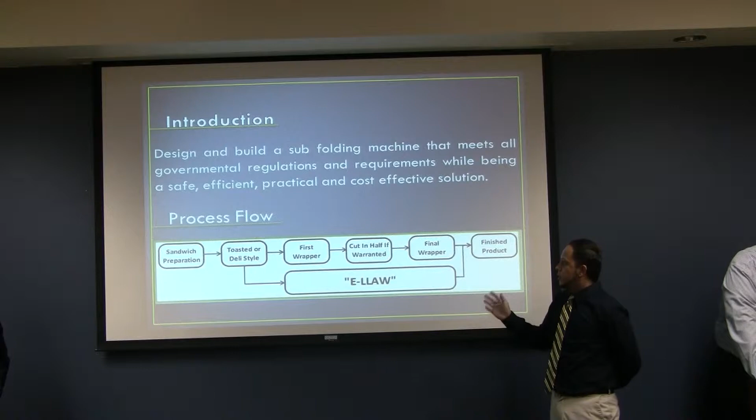As seen here, the process flow at a sub shop is simple. You come in, you choose your stuff, but what we're focusing on is at the end, we have some steps like wrapping the sandwich, cutting, wrapping again, and packaging the product. Our machine, code named E-LLAW, is going to take over these steps and facilitate them.

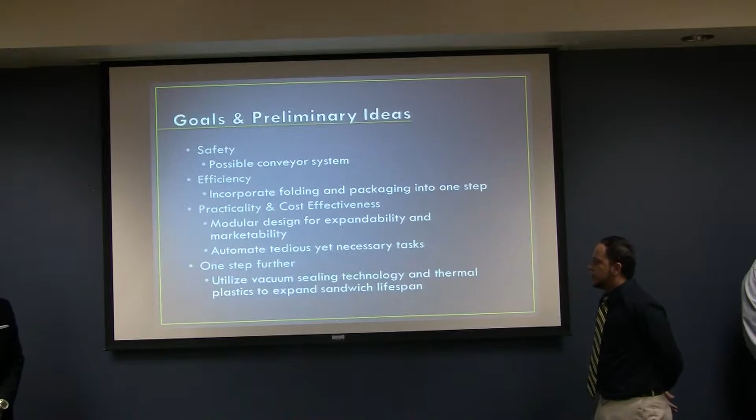Danny's going to explain how we're going to achieve this. As with any machine, our paramount goal is safety, and we intend to accomplish this possibly using a conveyor type of system. Secondly, it needs to be efficient.

To tackle this task, we intend to consolidate multiple steps into one, mainly being the folding and wrapping of the sandwich. Lastly, it needs to be practical and cost-effective.

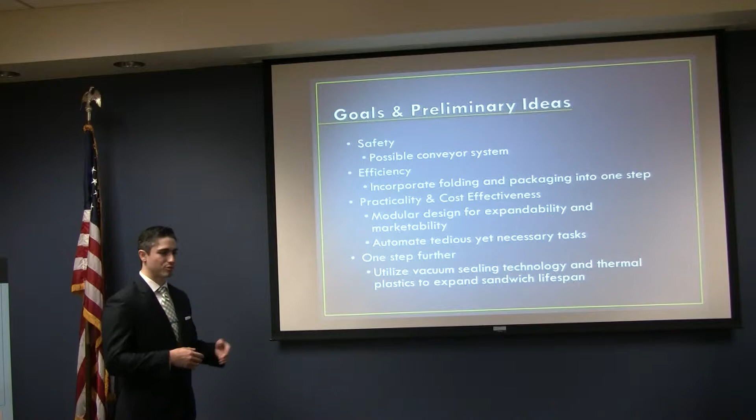To handle both of these, we intend to design a modular system which will automate a tedious task. In addition to all these goals, we also want to utilize vacuum sealing technology to prolong the life of the sandwiches. This represents a photograph of a machine that is currently able to be purchased.

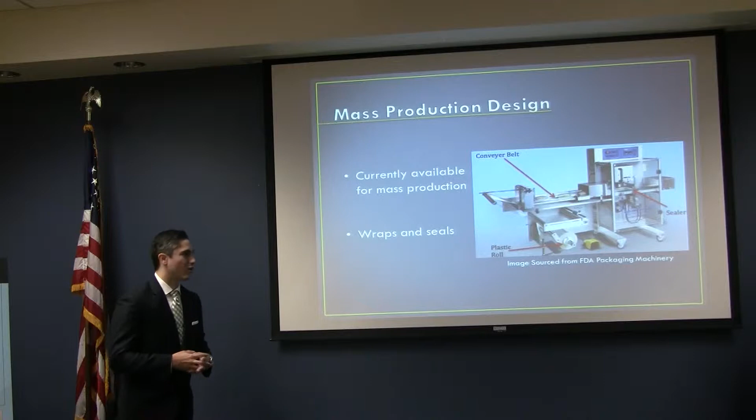You will notice that it's rather large, so our goal is to shrink this on a small scale. But this machine also utilizes the same type of technology that we wish to use, being the vacuum sealer and the plastic bags. Omar will now discuss some of the research that has gone into this project.

Since our end product is going to be a global reach product, in other words trying to be viable to the market itself on a global scale, we're conforming to the ISO standards. ISO stands for International Organization for Standardization. 22,000 stands for any food-based process or device.

On top of this, we're also conforming to ISO 9001-2000, which is the quality management arm of ISO 22000. This allows us, if we achieve ISO certification, to further facilitate OSHA and FDA certification down the line, since some of the guidelines are equivalent.

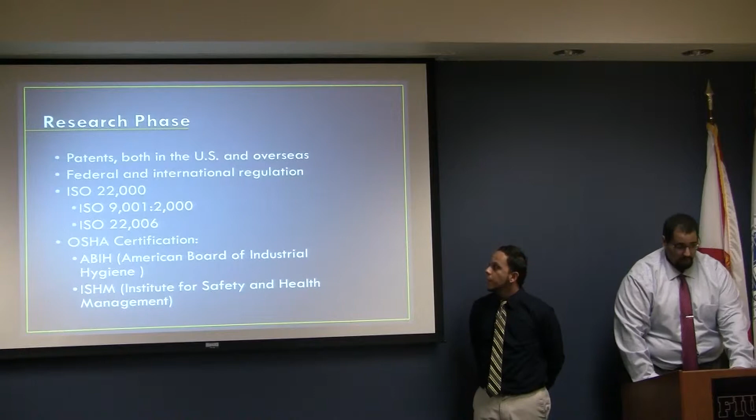Carlos will now speak on more of the global aspects of this project. As Omar mentioned, the ISO guidelines make our product marketable globally, but we also have to look at small details such as safety, where we have to use warning signs on our machine that are understood globally.

Most of the world uses SI units. We plan to use English and SI units. We also want to look at guidelines—for example, the European Medicines Agency may have health guidelines that we don't have here, and just by using those, we make our product certified in those countries, Europe in this case.

We also understand that environmental factors are important nowadays, so for our parts we're looking for corrosion-resistant materials that will prolong the sustainability of the product. And for a wrapping medium, it could be plastic or paper—we're looking for biodegradable and recyclable parts.

This concludes the research. We're going to move into the design phase, and Omar's going to take us through it.

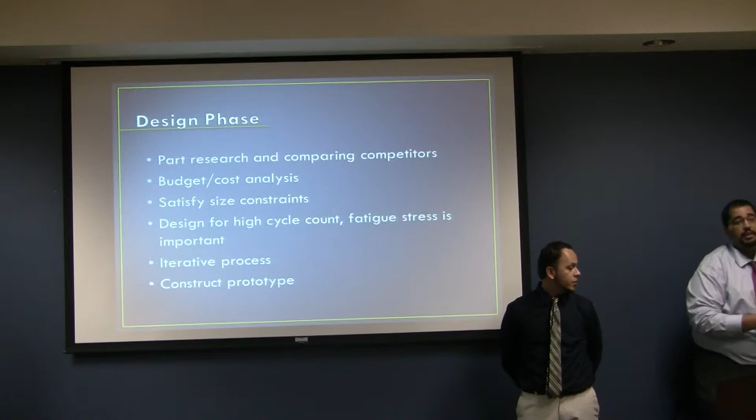For the design phase, since this is going to be a device which will eventually be patented, or ideally be patented, we're first going to actually research the market, both domestically and globally, to find out any device comparable to what our design is.

Secondly, after we do this, since we are given a budgetary and design constraint, we are going to get those devices and see what can and cannot be used according to our specifications.

Upon this, we're going to reiterate the budget again to maintain a high cycle life, which means a longer product and device mechanism life at a lower cost, which is ideal for the end buyer.

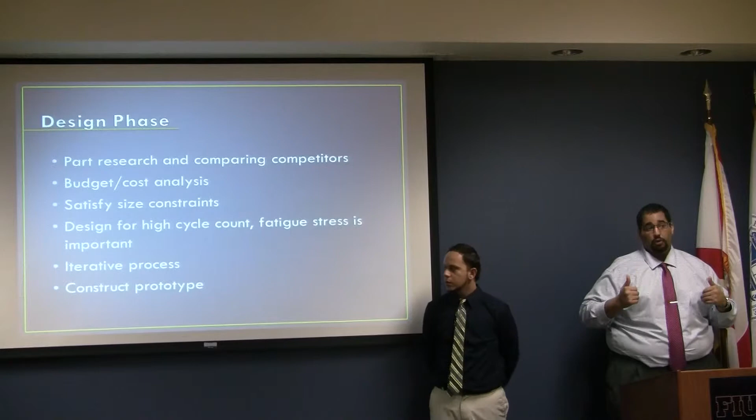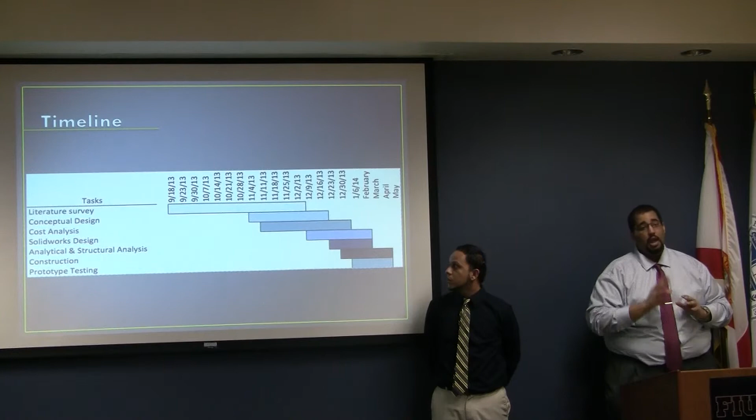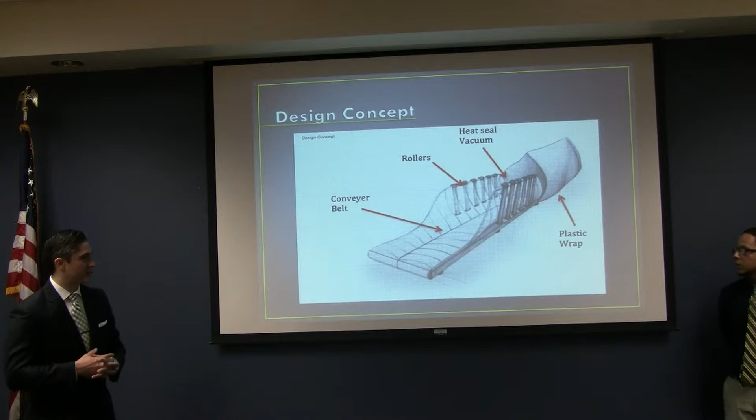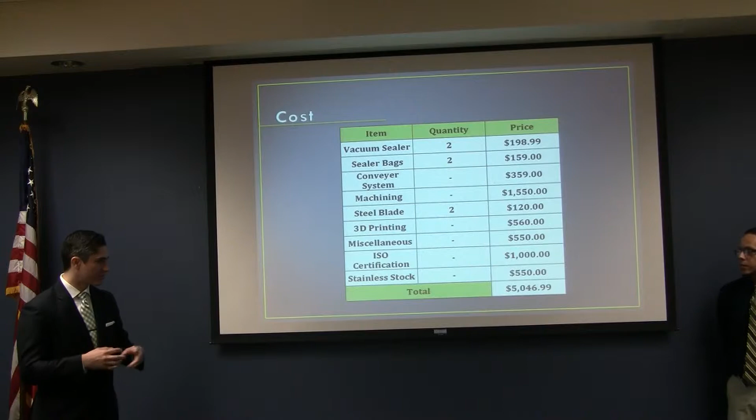The next slide represents our preliminary budget analysis. You will notice that the most expensive items thus far that we predict are going to be the machining as well as the use of stainless steel materials. In total, this is approximately $5,000.

We will now open the floor for questions. Are there any questions in the audience?

How much does the system that you showed us cost? We only get estimations. They don't want to say price, we have to contact them, but what I got from estimations was around 35,000. And that was in pounds, because that's actually UK.

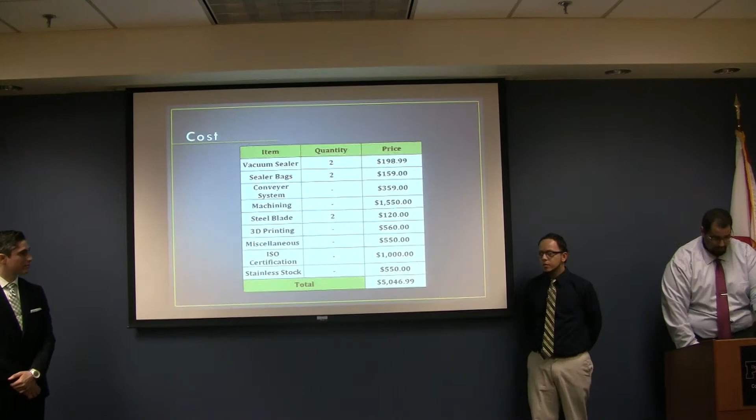Let's go back to your conceptual side. One question I want to throw out here is cleanliness. How are you going to clean this? How are you going to maintain it? That was actually one of the main things.

We also had a problem with, obviously, if you see it's rolling, so the bearings themselves, we can't use a hydraulic system, which was one of our investors' initial designs, but we had to throw it out. The hydraulic system's leaking. So what we're doing instead is using a food-safe conveyor belt that is able to be disassembled.

So all of those parts can be opened up and cleaned? At places like Quiznos, they already have conveyor belts available, so we know they exist and we can use those.

It's able to be deconstructed. We're able to deconstruct it, and most restaurants have a food quality dishwasher which exceeds the temperature, so we'll be able to sanitize it. But again, we will take that as one of our main concerns.

So when you bring us a prototype, I want to see you take it apart in front of us, because that's what's going to happen in reality. Yes, that is very true. You're going to need to have some hourly individual come in and tear it down and put it back together again, of course.

Any other questions? What is the approximate size of this? Oh, that's an excellent question. We're trying to adapt to current space, so we're minimizing the size to 14 by 14, which is around more or less what most sandwich shops use. We're referencing Subway, but most Quiznos or Subways or any other sandwich shop usually have a 14 by 14 square space.

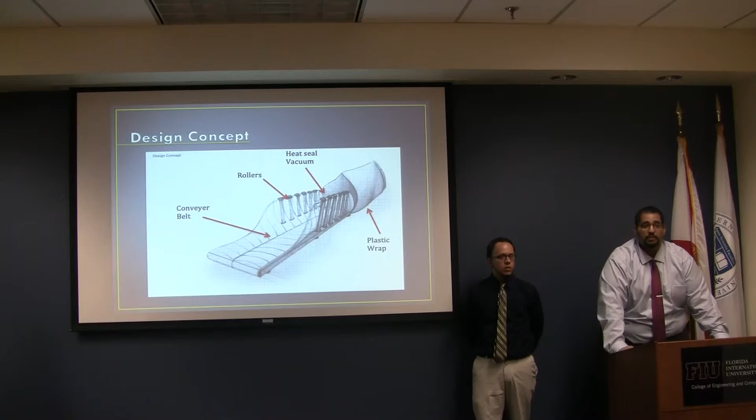I reiterate the concern of this gentleman about cleanliness. Yes, and that is one of our main concerns, and it's actually one of our main goals.

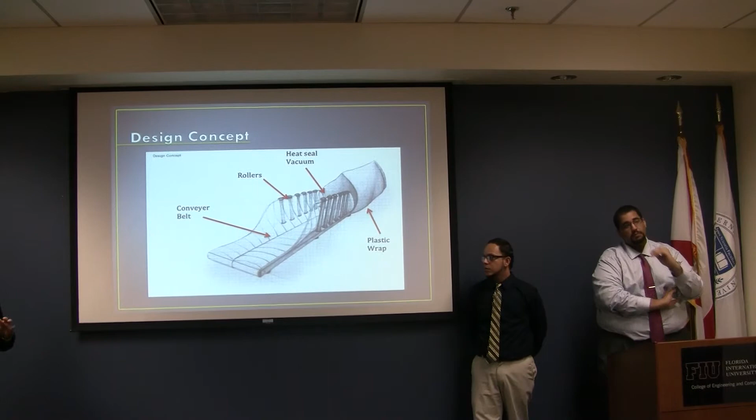What about the maintenance aspect of this machine? What's going to fail and how easy is it going to be to repair? Yeah, this is why we want to do it in a modular system, such that if a part were to fail, the replacement will be fairly simple, we would hope, and cost-effective, hopefully. As with any moving part, they can fail, so we want to keep it to a minimum, but there's some things we aren't going to be able to avoid, such as the rollers and such.

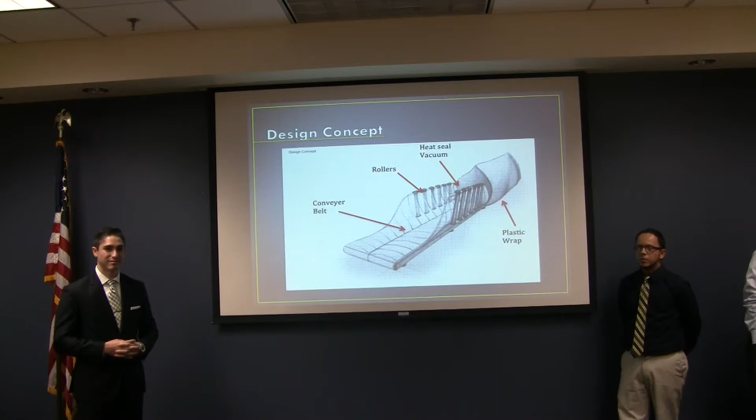You're doing sub-folding, so I'll show my ignorance of lack of international travel—does everybody eat subs around the world? That's a good question. Not everyone does, so I don't know if you have global reach for subs, perhaps for a wrap. There are Subways all over the world. Does that mean not everyone eats subs? Isn't Subway the number one restaurant? I think Subway's the most, over McDonald's, at the very least—I don't know if they all have sub sandwiches.

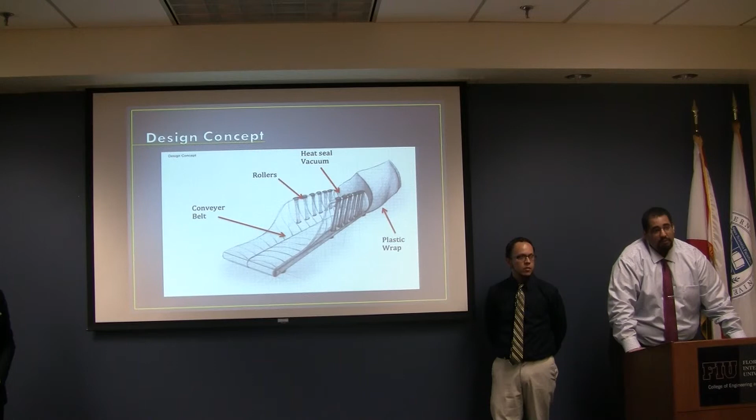You said about having a long life at low cost, right? Yes. What's the long life—what would be the definition of a long life? What we're trying to do is shoot for around a 5-year lifespan. That's our minimum; if we could go above that, that would be fantastic. But a 5-year minimum for the cost would be fantastic.

We haven't done the benefit-cost ratio analysis yet, but once we do that, we'll be able to fine-tune an actual lifespan of the product to accommodate both the buyer and the investor. Are you going to be benchmarking against the larger units already on the market, or

are you benchmarking against labor? What we want to do is, what the investor said in the beginning, is that he feels you need a person to prepare the sandwich, but you don't need a person to take the time when you're busy to do this tedious task. So we want to give employees more time to work on what's important. What we showed earlier with mass production isn't something we're competing against, because that's for packaging and selling at supermarkets—it's too large to be comparable with ours. Ours is going to be a large reduced version to aid the employees, or sandwich artists.

So you're competing against the labor. Aiding them—I like to use that word. Supplementing, yes. If it's cheaper and easier for them to just fold this up and put it in a bag, obviously they're not going to buy this device, right? Exactly, so that's another part of the cost-benefit we have to analyze. So that's what you guys have to prove all throughout, right?